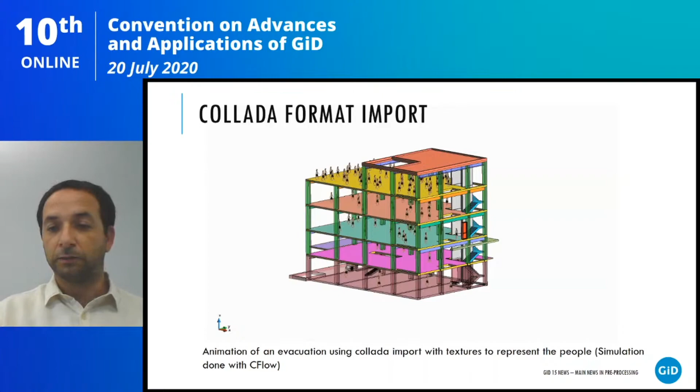Here we see an example of animation. This animation is an evacuation simulation of people in a building, and the people are represented with these textures. The simulation is done with CFlow code.

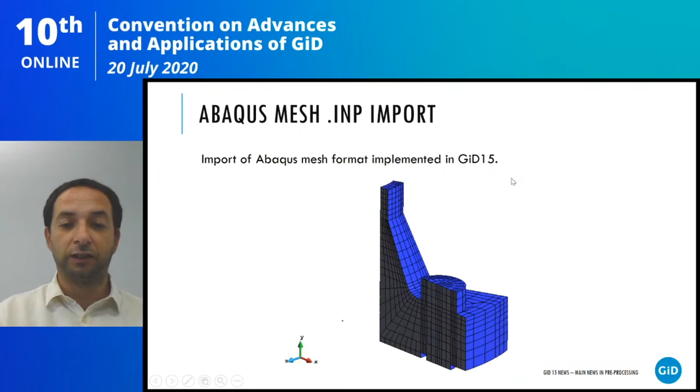We also have the new mesh format of Abaqus, which we can import directly in GiD 15. Here you see an example of the volume mesh. Also the G-code format, a widely used format, mostly for machinery, additive manufacturing processes, cutting machinery, and 3D printing. This format typically defines the paths that the machine should follow for these machinery processes, and also defines how the machine will follow these paths over time. Here in this example, we see the machinery path of a boomerang.

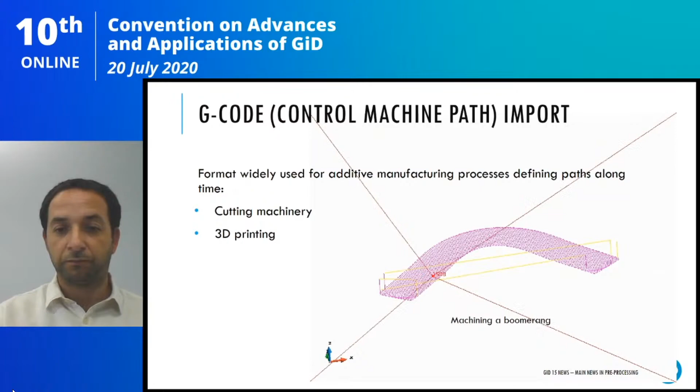Exodus 2 format, which is an HDF5 format. The old one was NetCDF based, and this new one is HDF5, a more powerful binary format. It's typically used also by the Cubit Sandia mesher, and it's also handled by Paraview.

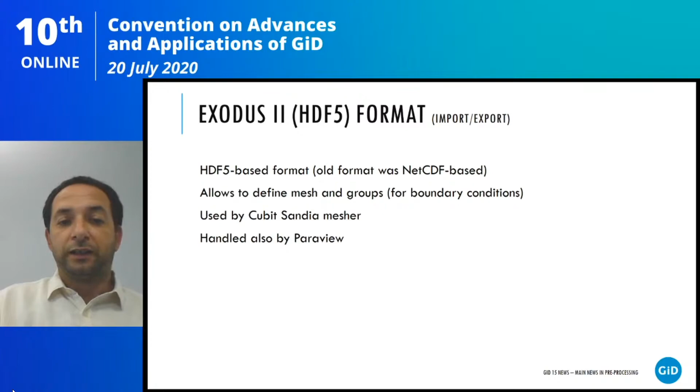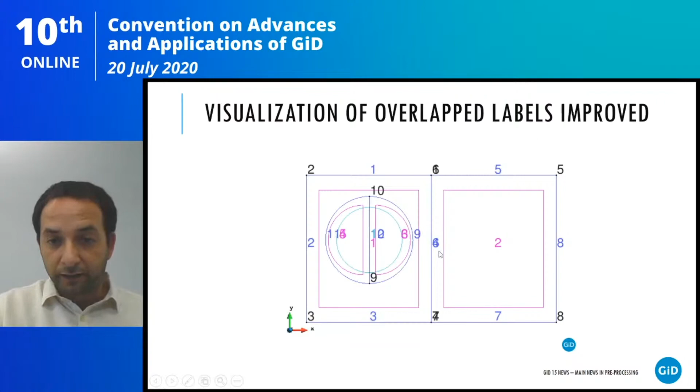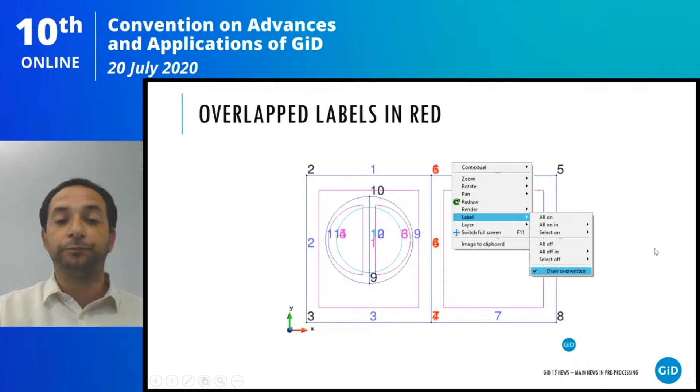Other things in pre-processing regarding visualization: in GiD we had some problems visualizing the labels of entities sometimes, mostly when they were in the same place in space. For example, two surfaces with the same center, or a surface and a volume with labels in the same position. The way we used to detect this was just noticing something strange and realizing you might have two entities there. Now we have the option to highlight in red, by clicking the option in the contextual menu, the cases where labels are overlapped, so we can detect it graphically in a more efficient and clearer way.

Also regarding visualization in the pre-processing part, contact volumes were previously represented just with the light blue color of GiD volumes, showing only the two surfaces of the contact volume. Now we are also representing, with dashed lines and arrows, the connections between these two virtual surfaces — let's call them that, because geometrically they aren't actual connections — representing the master and slave surfaces and their orientation regarding the volume. So now it's easier to graphically detect the contact volumes and their orientation.

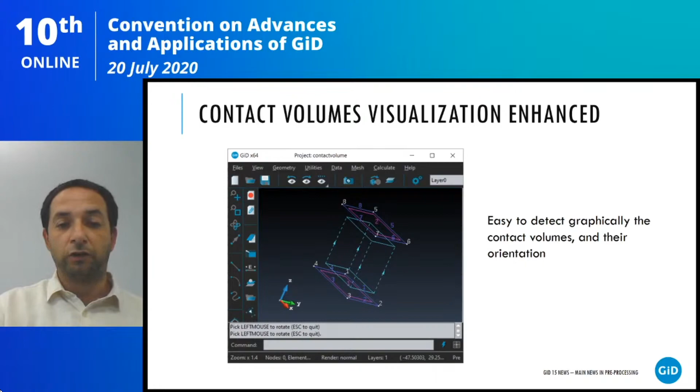We have put a lot of effort in the hard refactoring process. We have changed internally the whole meshing process, and it has been enhanced a lot. The key point is that all the workflow GiD internally follows to mesh all the entities has been changed and made more independent, the meshing of each part of the model.

So now the mesh generation has more parallelism in the process. In some cases now there's no need to regenerate the mesh if the data affecting the model is not affecting directly the mesh generation. So if you change some property of the model which is not affecting the mesh generation, when you click generate mesh, the mesh is not generated again. GiD detects that it should be the same, and you can save this time.

We have also detected several bottlenecks. Just by improving and changing this workflow for the meshing process, we detected a lot of bottlenecks, and we made changes so the algorithms and data structures are more efficient. We improved a lot the performance there, and of course fixed bugs during this whole process.

A big change is that GiD now is prepared to maintain the connection between geometry and mesh. In the previous version, the mesh data was all put together in the project, and once the mesh is generated, we didn't have the connection between the mesh and the geometrical entities it comes from. Now GiD is prepared for this, though it's not yet ready for use.

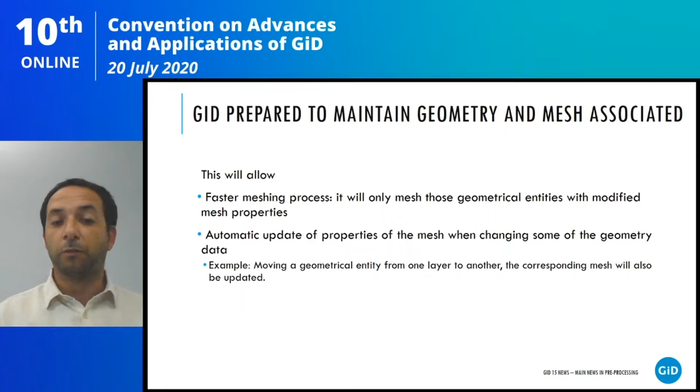So let's go to the main news in the customization part. I will explain a few of them.

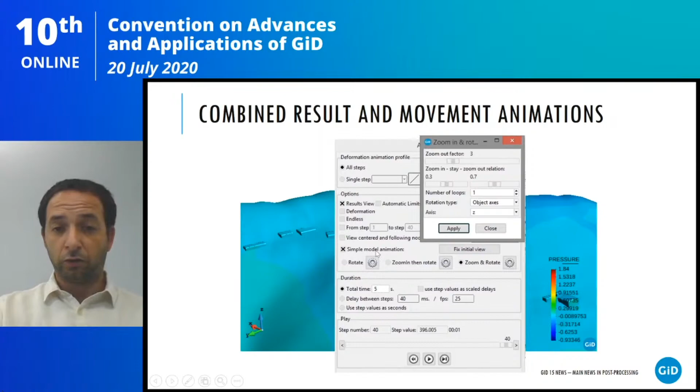Then the main news in the post-processing part, some of them. Now we can combine results and movement in the animation. Here you have the window controlling this, and some example here. You can see the animation done with the results, and the camera is moving and also the results are changing. So you can combine these things in this new version.

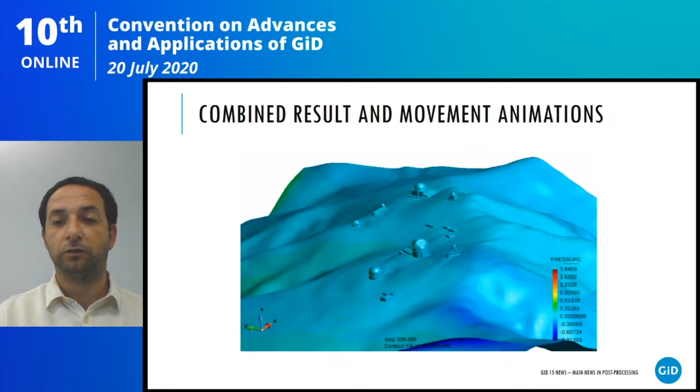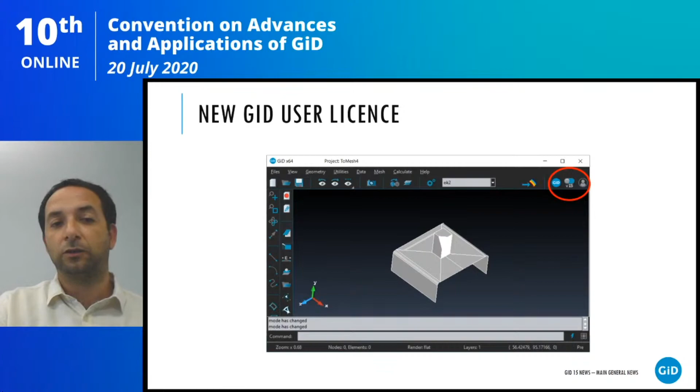Then some main general news. The main general news we have here is a new kind of license, the GiD user license. If you open GiD 15, you will see this icon next to the logo that indicates if it is logged in or not, if it has a password or not. If you click them, you enter the options of the new GiD user license. This license is associated to the user.

So it's a permanent license as the other ones. Previously we had local license, USB, and floating licenses. Now you have a new one, named user. You need to register to use this license, and you need periodic internet connection, and you can use it everywhere. It's not limited to a specific device or to being connected in a network with a floating server.

So you can use it anywhere, just signing in GiD. When you click on the icon, you put your email address, which is the username we use, and your password, then GiD connects to our servers and detects that you have the license, and you can use GiD everywhere. So wherever you go, log in, open GiD, sign in, and you can use GiD in a professional mode.

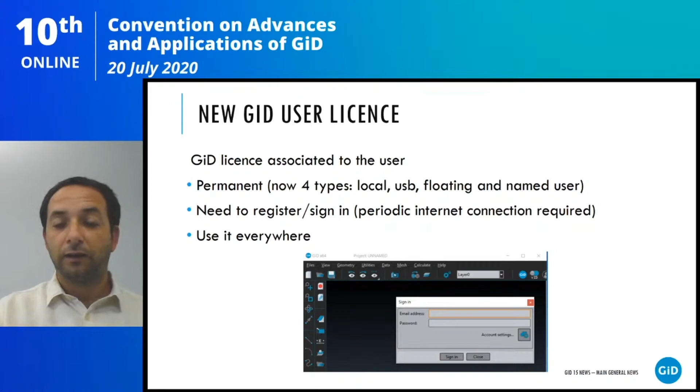A new thing regarding licensing and pricing is our new subscription system. Now users can apply for a subscription to GiD. It can be monthly or yearly, with options for automatic renewal or cancel anytime, and it can be assigned to specific users.

We thought about a typical case of an institution with several researchers, or a university with several students using it. They should have a pool of subscriptions, 10, 20, whatever, and they can assign or unassign each subscription to users of GiD. If a new researcher joins, you can assign the subscription to the new user.

All the details of these subscriptions can be found on our website, in the subscription section.

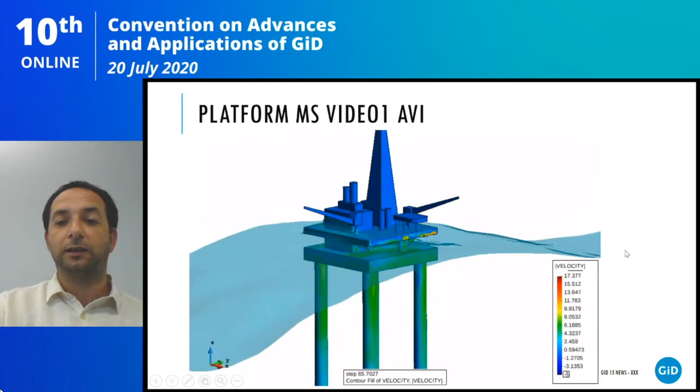Here are some examples. Of course, each kind of video has different properties and may create different file sizes. This is an example of AVI, the previous format we had, and here is MP4, which as you saw in the previous slide produces a smaller output file. And here are some examples of WebM transparent, which can be put in a browser.

Now, regarding storing preferences and problem types: each version of GiD now stores its preferences independently. So if you work with different versions of GiD, they don't conflict with each other. You can open version 15, then open version 14, and they work with different sets of preferences.

We can now also automatically load problem types stored in the preferences folder. Previously, some users might not have rights to write in the typical problem types folder, under problem data, GiD, whatever. Now we can also read problem types from the preferences folder, which is more public, so there's no problem for any user to work with it.

The GiD 15 graphical user interface is now fully translated into Russian, apart from Spanish and English of course. And now we have included in the Internet Retrieve the translation of the different languages for the GUI messages as well.